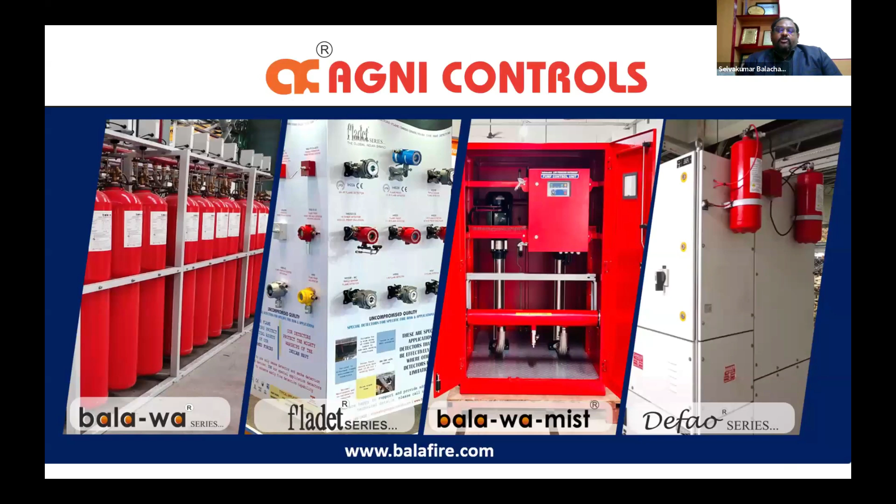We at Agni Controls offer products and systems in the following brands. Bala-wa series, which is gas-based fire suppression systems. Fladet series, for special application fire detectors such as heat, spark, ember, and high temperature probe type heat detectors. Bala-wa mist, water mist fire suppression systems, including low pressure and high pressure water mist systems.

And Defao series, which is tube based detect and extinguishing fire extinguishing systems. We have our presence in these following verticals: oil refineries, power generation, heavy engineering, automobiles, textile mills, and defense sectors. So without much details, I'm just showing our different customers, some important customers in all the segments.

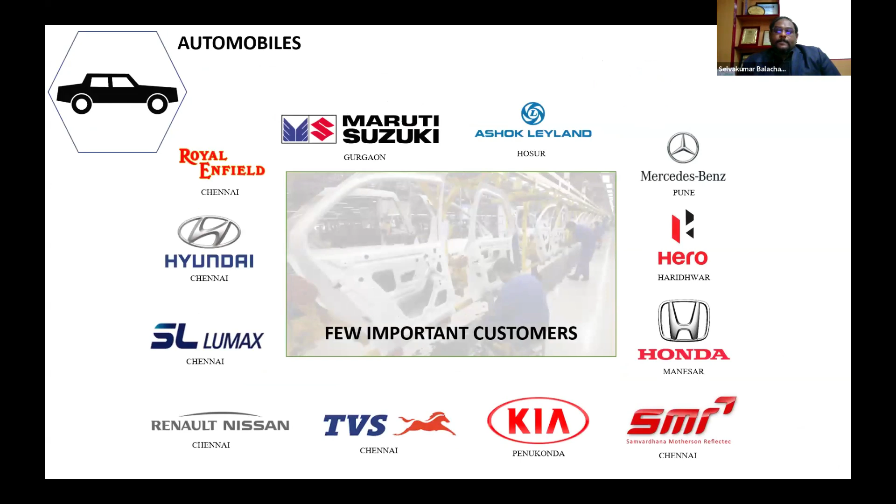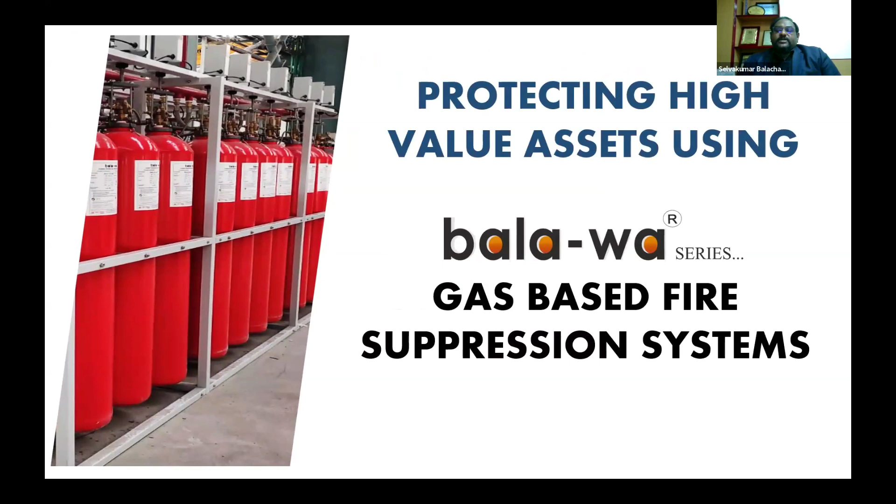So today, going to the topic, protecting high value assets using Bala-wa series gas-based fire suppression systems. So when you talk about gas-based fire suppression systems, we have carbon dioxide fire extinguishing systems, inert gas fire extinguishing systems, clean agent fire extinguishing systems. So inert gas is also a clean agent. As per NFPA 2001, inert and chemical-based extinguishing agents both are covered under NFPA 2001.

The reason why I put it separately is because inert is a naturally occurring gas, whereas the other chemical-based fire extinguishing agents are manufactured for the purpose of fire protection. So I want to clearly show a differentiation between the inert and a clean agent system.

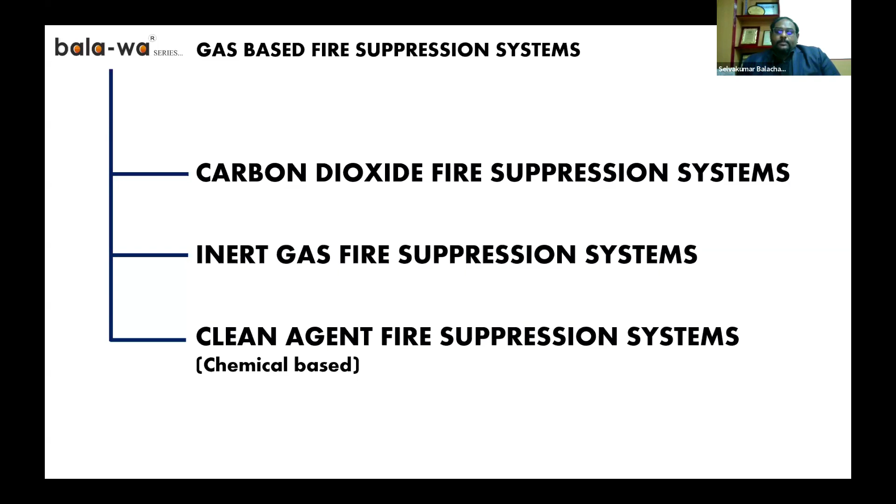So this particular topic, high value assets, is a very big topic, and I will not be doing justice if I squeeze in everything in this very small, brief time of 30 to 40 minutes. So I'm going to split this session into two sections or webinars. So today, predominantly, I will be talking more about the carbon dioxide fire extinguishing systems.

So when you're talking about high value assets, what are we talking about? Now with the modern technology, AI driven technology, data, everything, all the machineries which used to be conventional are now turning smart, and the cost of machineries is very, very high. And if your machine breaks down, of course, the entire production line or the process breaks. And the cost of a breakdown is unimaginable in many cases.

For example, a refinery. If a gas turbine is tripped, the power grid collapses. So you can imagine the magnitude of the assets. That is the reason why we are calling them high value assets. It's not just in terms of money, it is also in terms of their value. If your power grid collapses, it's going to be a widespread blackout, and restoring it is going to be a huge challenge.

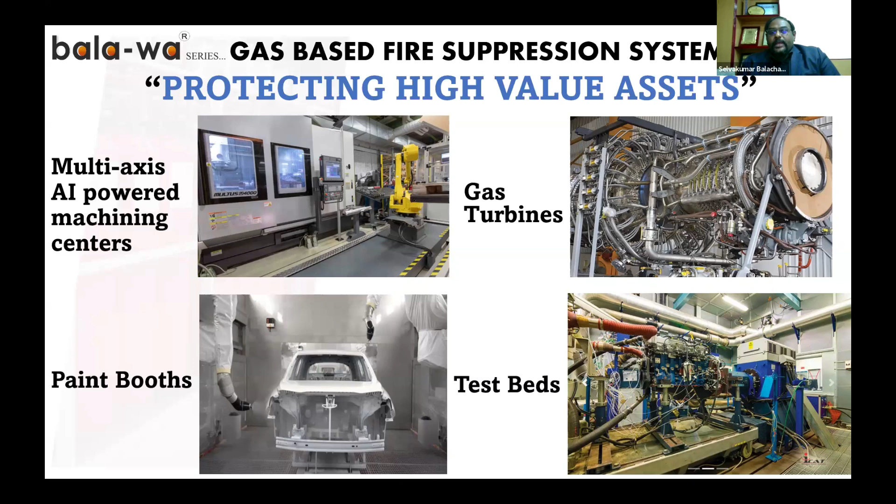So I've just shown some four images: multi-axis AI powered machining centers, gas turbines, paint booths, test cells or test beds. So why is it very, very important for us to protect the machineries? Well, this is a small machine, a CNC turning machine. And I will just show a small clip, a 3-4 second clip. So you can watch this clip. I'll play it.

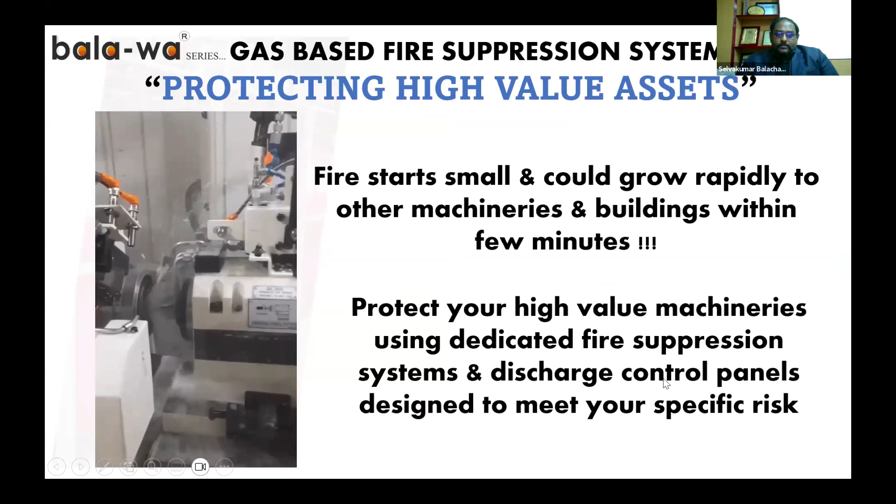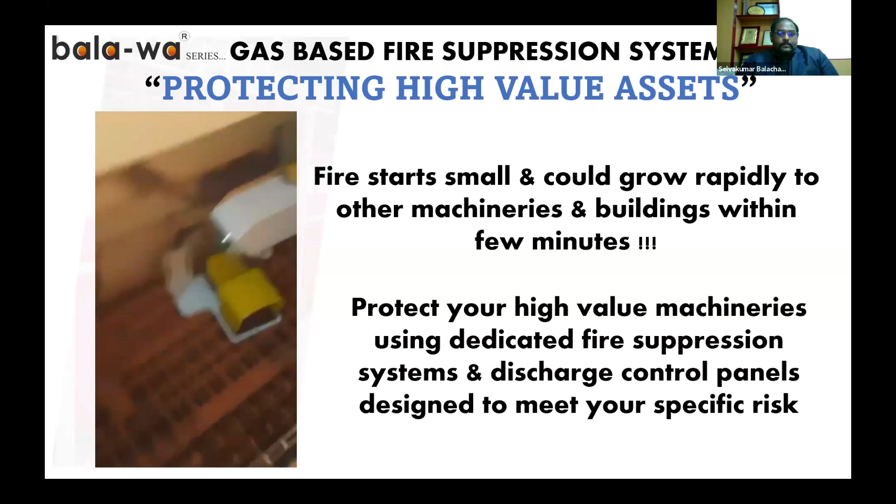So you could have seen that. In case any of you missed it, I would like to play that video once again. So this is actually a machining process. This is how fire starts in many of the applications. Fire starts very small, and if we are not equipped to extinguish the fire when it's small, it is going to grow rapidly to other machineries and throughout the entire building as well.

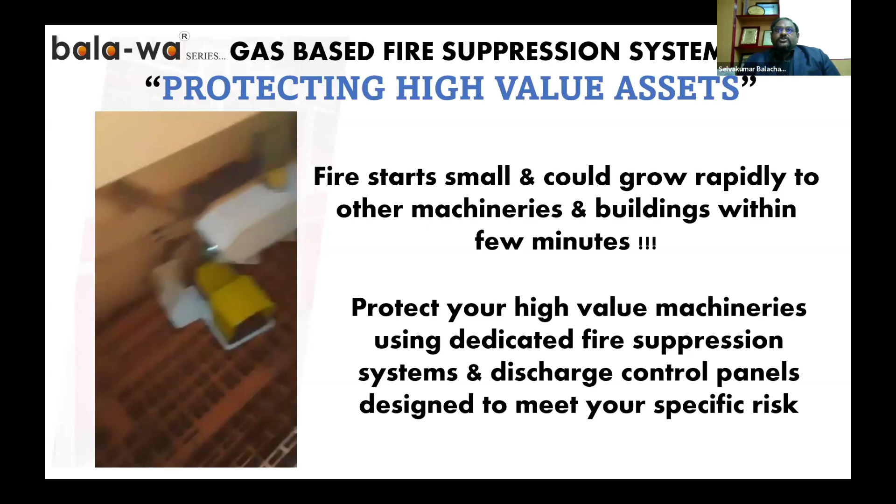Within a few minutes or even seconds, in some cases, if the calorific value of the fuel or the material burning is very high. So it is important for us to protect your high value machineries using dedicated fire suppression systems and dedicated discharge control panels designed to meet your specific machine risk. There is no one-stop solution; you cannot just buy a common panel which is available and use it for all the applications. It may work sometimes, but may not be suitable in many of these applications, which we will discuss in detail during the upcoming slides.

So what are we talking about in terms of protecting high value assets? Number one asset is always going to be human life. Life safety is going to be priority always. So personal protection. And the next big thing right now is the data. So data is the next big thing which needs protection. And without data, our entire infrastructure collapses.

Production machineries in many of the continuous process areas: without the machineries, the entire process stops. Of course, electrical infrastructure: without power, nothing runs. And storage areas, an area of concern where a lot of material with huge calorific values are stored. And these areas are often neglected. Test equipment and test facilities. In many of the cases, the testing equipment is much more expensive and critical than the actual production machines. So protecting all these different assets becomes our priority when we are talking about high value assets.

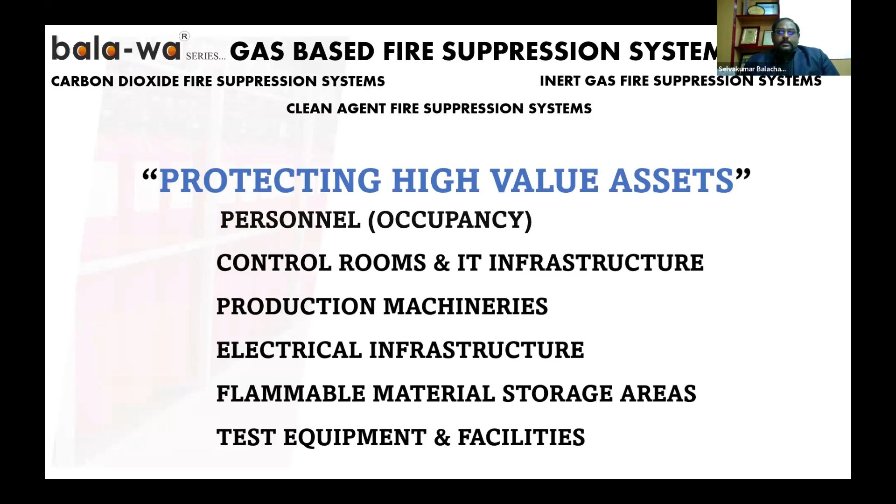So just for a small comparison, I have listed out what type of system can be used in protecting these various assets. So where personnel is present, CO2 cannot be used, which I will discuss in the upcoming slides. Control rooms, again, are normally occupied and it is not safe for human beings. Water will damage the equipment, so it is not used in many of these applications.

Production machines, electrical infrastructure, flammable storage areas, test equipment. So here you could see that in most of these applications, a gas-based fire suppression system, be it any extinguishing agent, is more suitable for protection of these kinds of equipment.

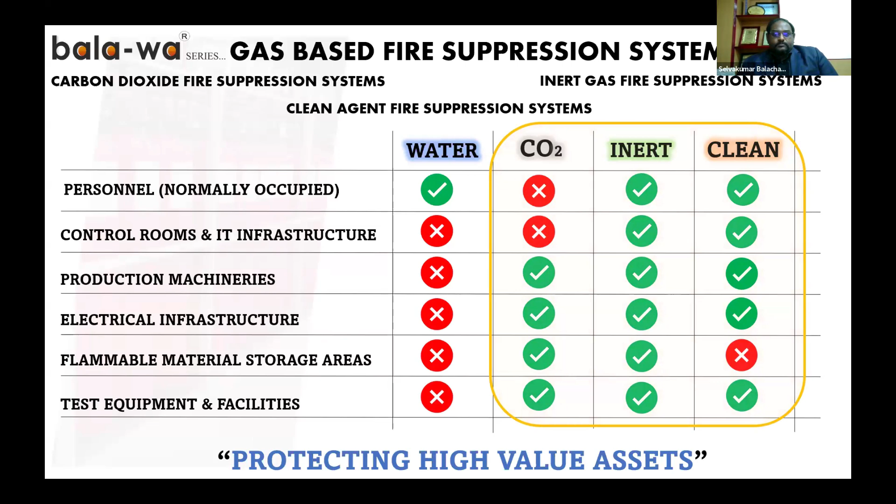So, as I told you, today we are going to discuss in detail carbon dioxide fire extinguishing systems and how they protect high value assets. These systems are designed as per the national and international standards IS 15528, NFPA 12, VDS 2093.

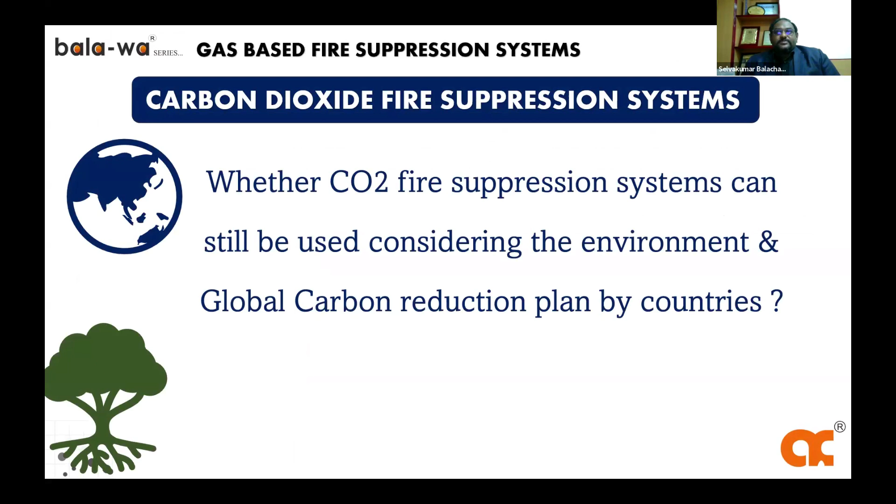Now the real question comes: CO2. When you talk about CO2, we often hear many people asking whether a CO2 system can be used considering the environment. While everyone is talking about green, clean energy, clean power, clean extinguishing systems, you're talking about a CO2 system. Well, today we will break the myth. And in the upcoming slides, I will show you why and how.

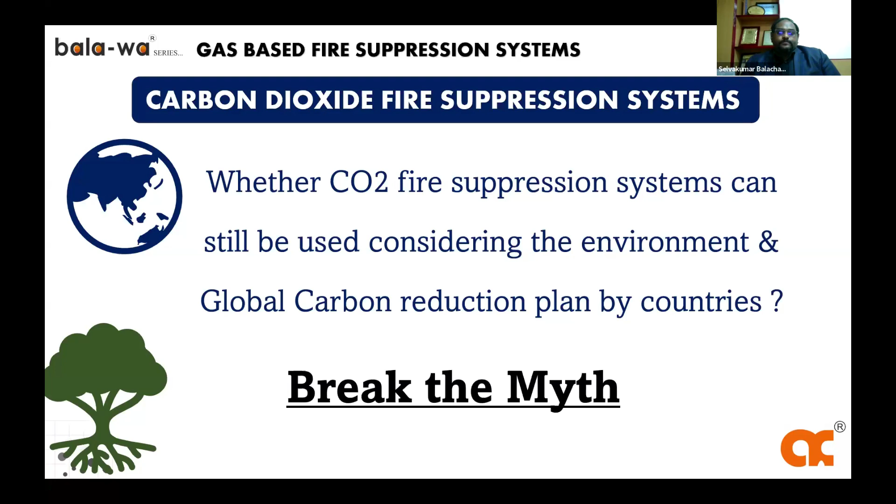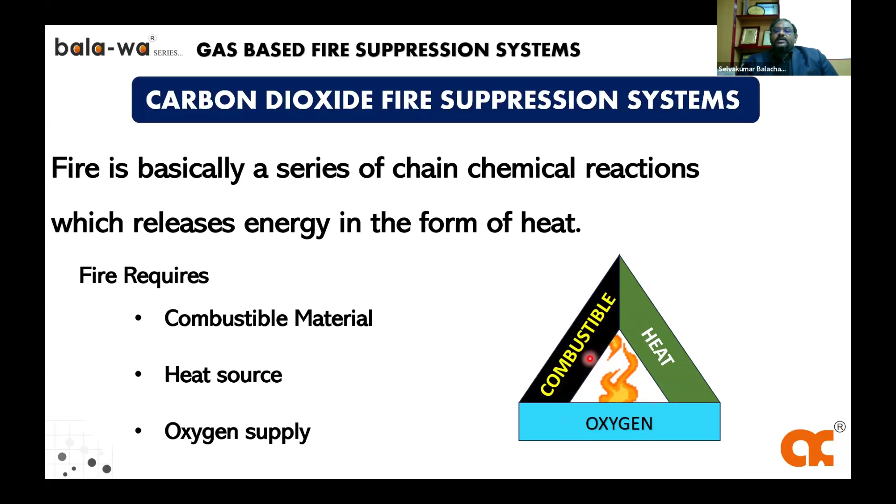So before going into the actual suppression system: fire is a chemical reaction, an exothermic reaction, meaning that heat is released as a result of the chemical reaction. This is what we call the basic fire triangle. Any fire to occur requires combustible material or fuel, which is always available in your risk area. Oxygen is always available in our atmosphere at 20.9%. And when sufficient heat occurs to ignite the combustible material, fire occurs.

So, how does CO2 extinguish the fire? Well, when you apply it, CO2 displaces the oxygen with carbon dioxide, and it also has a cooling effect. So CO2 breaks two of the three links in the fire triangle by reducing the heat, rather. It will not eliminate it, but definitely it will reduce the heat, and by displacing the oxygen content below 14% it ensures that fire is extinguished. And that is how carbon dioxide extinguishes the fire.

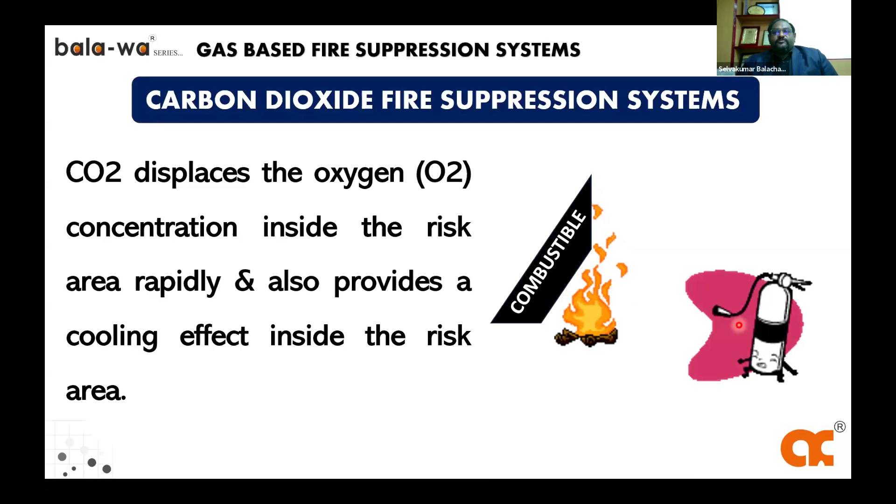So today, when we're talking about the CO2 system, we are going to see all these 6 points, which will give you a brief idea of what the gas suppression system is. For any system, we need to understand the physical properties. Carbon dioxide is a very unique gas where at the triple point it exists as solid, liquid, and gas. Depending on the temperature, carbon dioxide can either be liquid, vapor, or solid. At room temperature and pressure, CO2 is a gas. And when you fill it in high pressure cylinders, it is two-thirds liquid and one-third vapor.

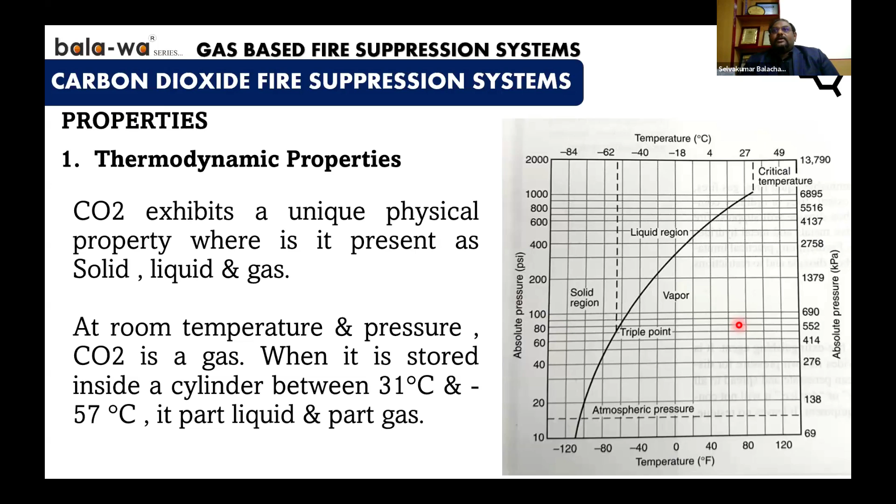Carbon dioxide has another unique property: the pressure of CO2 varies with temperature. It is directly proportional. So when temperature is low, the pressure inside the cylinder is low. When the temperature goes high, the pressure inside the cylinder goes high. An interesting fact is that 1 kg of CO2 will have the same pressure as 100 kg of CO2. And that is the reason why you cannot monitor the contents inside the cylinder using a pressure gauge.

With an extinguisher or a clean agent system or an inert system, you can measure using pressure gauges. Well, with CO2 they cannot be used because of these variations in pressure due to temperature fluctuations. That is the reason why CO2 cylinders are always kept in a hanging position using online monitors or weighing devices. Here you can see that all the cylinders are hanging through online monitors. So any loss of CO2 contents can be monitored through the weighing arrangement or the online monitors.

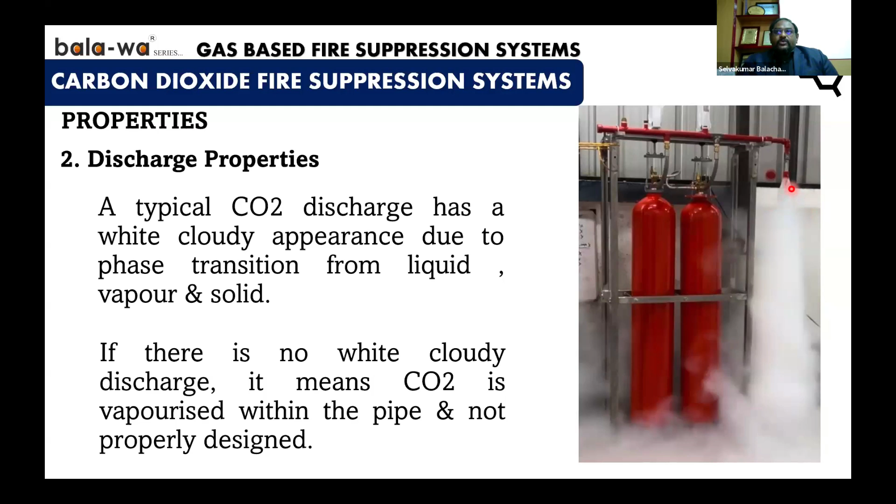So these are some other theoretical points, I'll go through quickly. CO2 discharges as a white cloudy vapor, this is where the transition happens from liquid to vapor. The nozzles and pipeline should be designed so that liquid converts into vapor at the nozzles only. This phase transition between liquid to vapor is what you see as a white cloudy fog. So if you discharge a system and see no white cloud, mist or fog, you know that your design or hydraulic system is not good.

When discharged, solid minute particles are released. It's important to earth the pipeline and the nozzles to ensure that static does not affect it, especially in explosion proof or flame proof atmospheres.

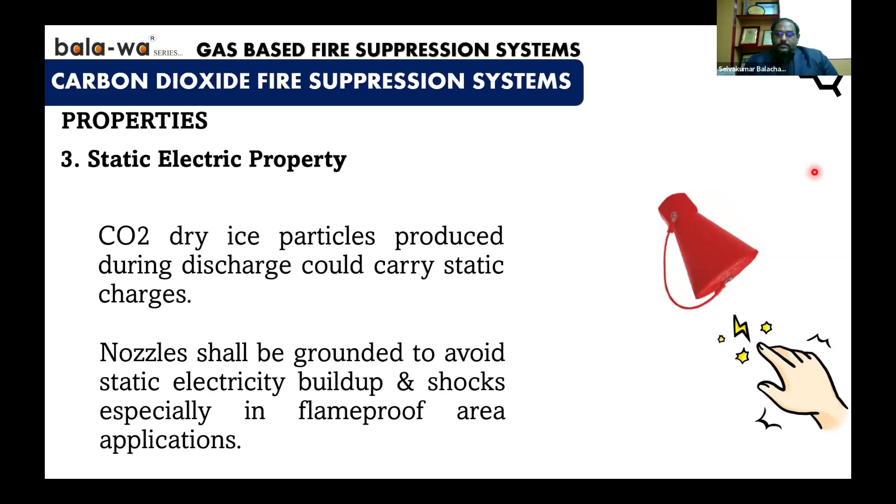Now we're going to talk about the environment. As I told you, we're going to break the myth about the impact of CO2 systems on climate and environment.

This is a UN Environment Programme document, a report from the Halon Technical Options Committee, published in December 2018. The report says that carbon dioxide used in fire protection applications is not produced for this use. Instead, it is captured from an otherwise emissive use, temporarily sequestering it until it is released.

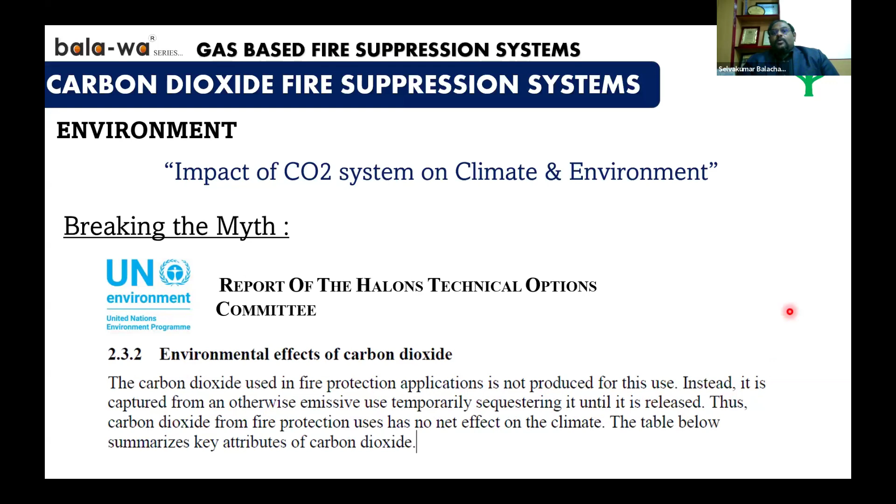So what it says is, number one, CO2 is not produced for the purpose of firefighting. CO2 is not manufactured just for fire protection; it's a byproduct of many other chemical processes like petrochemical refining, sugarcane, and alcohol production. So irrespective of whether you use a CO2 system or not, this CO2 is going to be released into the atmosphere unless the entire refining process, sugarcane, alcohol and other processes stop using it. We are not going to stop having CO2. So that's number one.

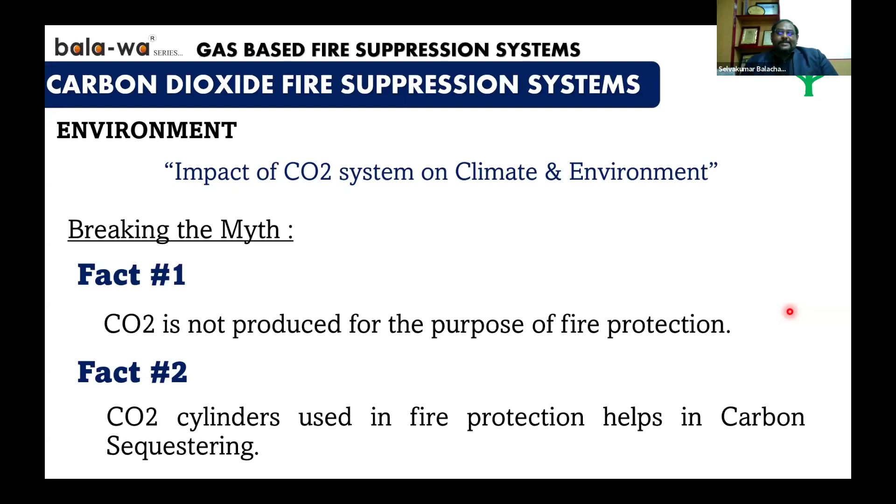So what we are doing instead of letting it go into the atmosphere is that this carbon is sequestered. What do you mean by sequestering? Instead of letting it go directly into the atmosphere, we are catching, securing, and storing it inside cylinders rather than directly exposing it to the atmosphere. So what we are doing is rather delaying the inevitable. That's what is happening.

And the conclusion of that UN climate committee was that CO2 systems have no net effect on climate. Which means whether you use a CO2 system or not, it is still not going to have any effect on the environment. It is going to be the same.

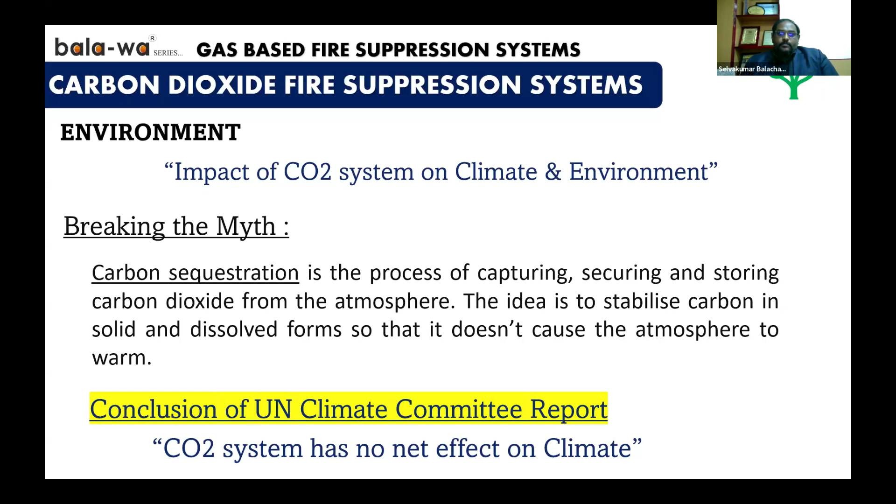That is the reason why carbon dioxide systems still have standards, not only here in India but throughout the world, even in the European Union where they talk about climate change. It is not banned because they cannot directly write off carbon dioxide, as it is still considered one of the best extinguishing agents for machinery applications and normally unoccupied or non-occupied areas.

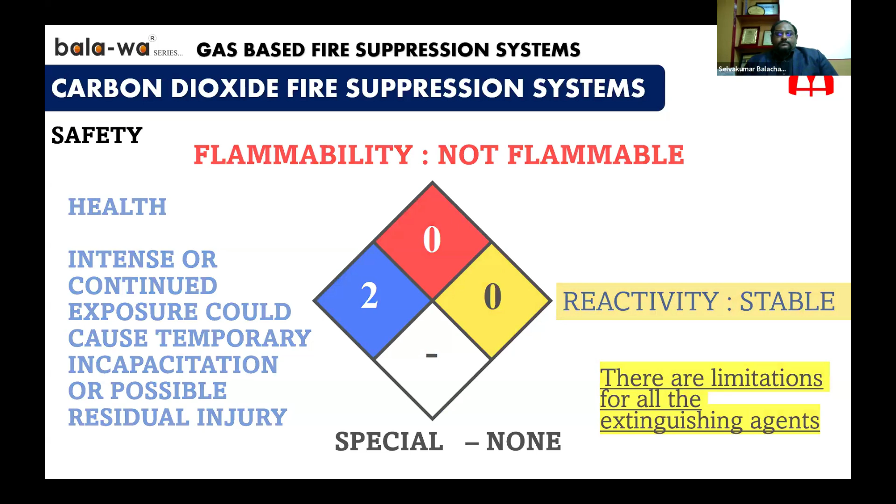So what happens inside the human body once you inhale or ingest? We all know that oxygen is carried in the blood cells to our brain and other parts of the body, all the cells. As I told you in the fire triangle slide, oxygen is displaced with carbon dioxide. The same happens in our bloodstream. The oxygen content inside our bloodstream is replaced with carbon dioxide, and the hemoglobin turns to carboxyhemoglobin.

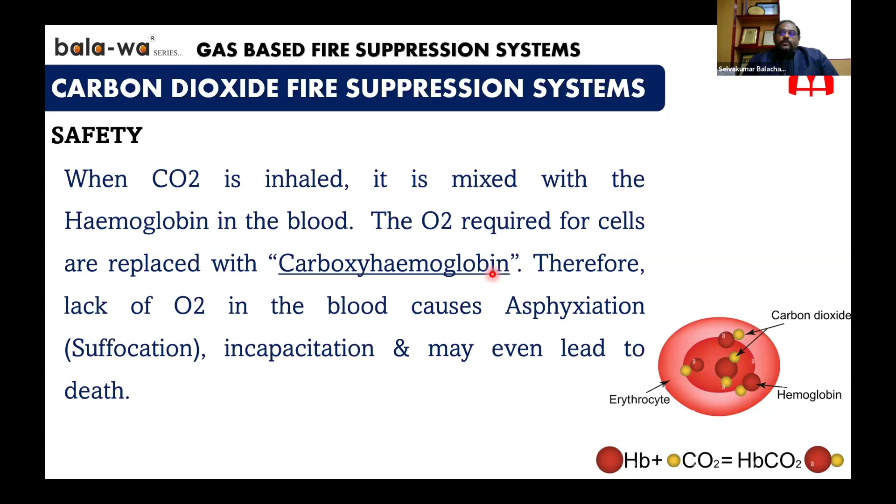There is a starvation of oxygen through all the cells, including the brain. That is why we have suffocation, asphyxiation, which causes you to fall unconscious, and ultimately it may even lead to death. That is the reason why carbon dioxide systems are normally not used in areas where human occupancy is always present.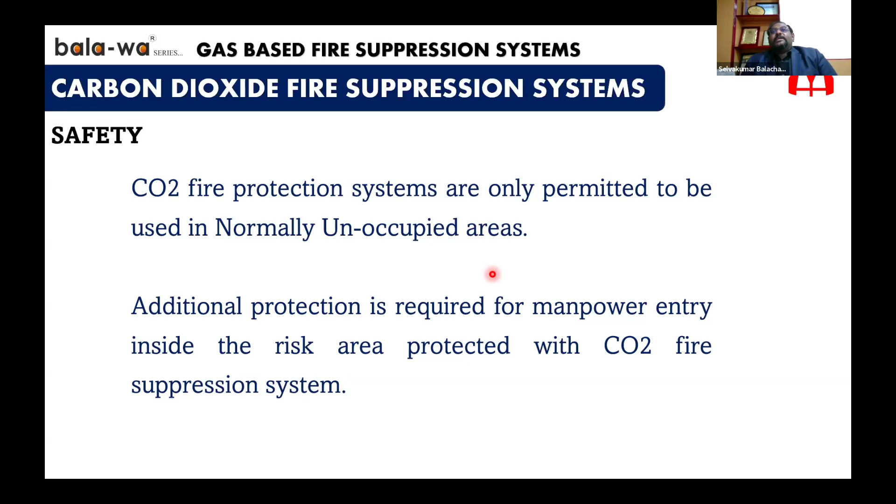However, additional protection is also required. You cannot simply say I have a machine and no one will enter. Someone has to go inside the machinery to service it, operate it, or in case of overhauling. We cannot completely avoid entry. So for that, other safety components need to be integrated with the system.

For example, we have the wintergreen odorizer. The wintergreen odorizer contains wintergreen oil, similar to axe oil or eucalyptus oil, with a very strong, pungent smell. So if you are not able to hear the alarms, or if the electrical system fails and you can't hear the flasher, hooters, or strobe horns, anything won't work. But if gas is discharged for some reason, you can get that strong smell even in the adjacent room.

If CO2 is leaking somewhere, you know that gas has leaked and you can evacuate the area. This is used in machinery to notify people that carbon dioxide gas has been released. The manual lockout valve, as I said, before entering the machines, the pipeline has to be completely isolated to prevent human discharge when a human is inside the machinery. And CO2 evacuation units are used to extract the CO2.

CO2 is a very dense agent, meaning once discharged, the gas settles at the bottom. So when discharging CO2 in an underground cellar or an oil pit or somewhere underground, the CO2 will be present at the lower level. You want to extract the CO2 into the atmosphere so that it is safer for human entry.

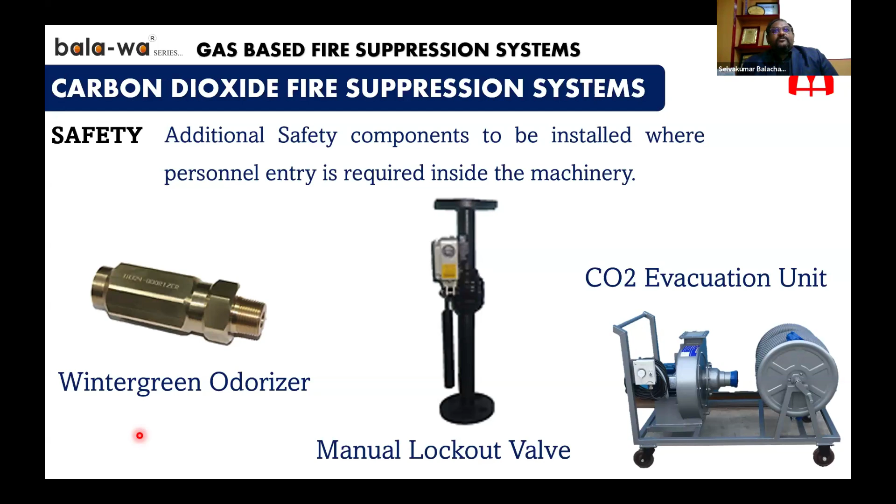Coming to the design basis, CO2 systems are available as high pressure systems and low pressure systems, depending on the storage temperature. As I told you, high pressure cylinders mean ambient temperature, not exceeding 49 degrees Celsius. It is stored in cylinders, which we normally use here in India.

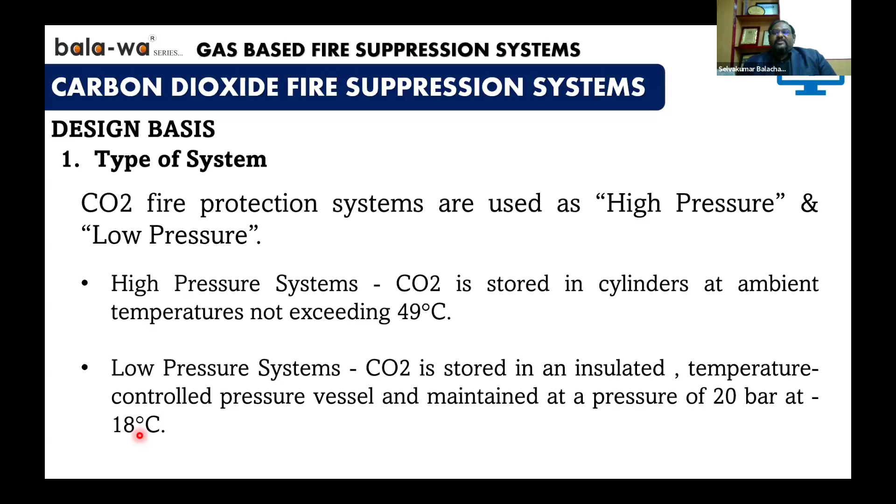Low pressure systems are used for bigger areas where a refrigeration unit, a big bulk container, is required. Refrigeration units are constantly required to maintain the CO2, the entire tank, at minus 18 degrees Celsius, so that the CO2 is maintained at 20 bar pressure. The running cost of low pressure systems is very, very high, and that is the reason why we don't use low pressure CO2 systems.

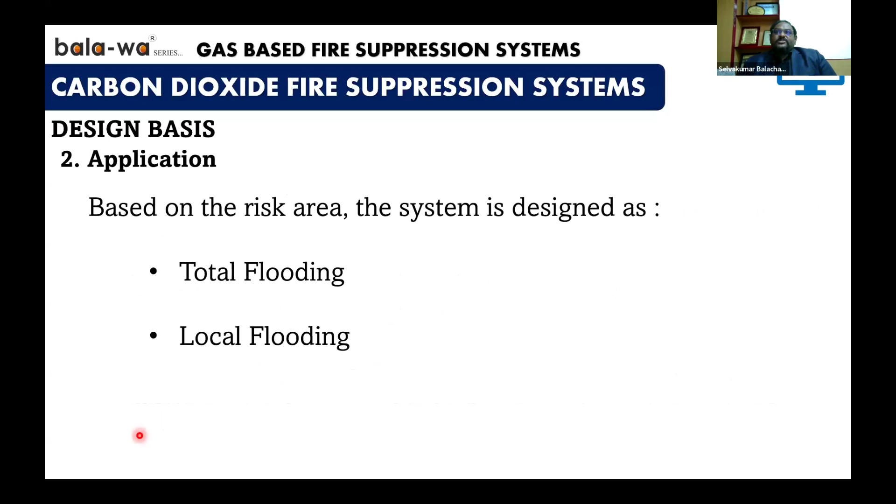Depending on the risk area, the system is also designed as a total flooding system or a local flooding system. What is a total flooding system? As the name suggests, the entire risk area, room, or machinery void is completely flooded with CO2, and the overall oxygen percentage inside the room is brought down from 20.9% to below 14%, thereby extinguishing the fire.

So wherever your nozzles are, wherever your equipment is, the total area, the entire volume is considered, and the overall volume is brought down below 14%. That is, I'm talking about the oxygen content.

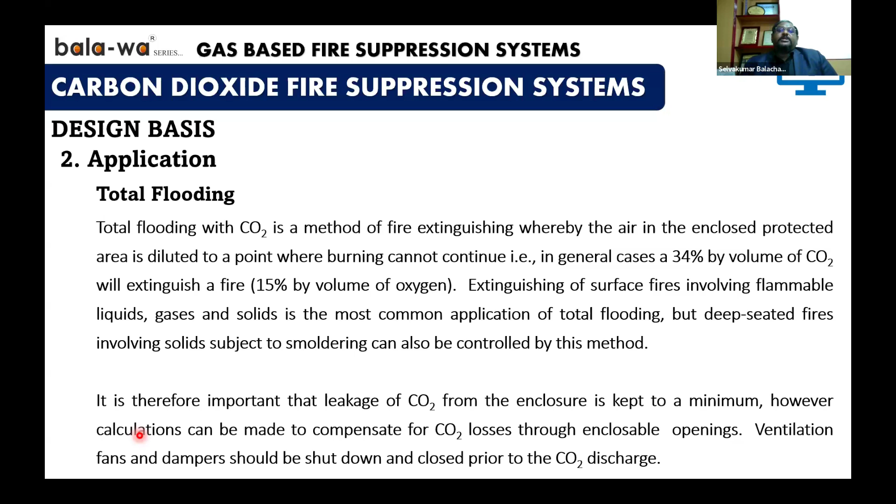So we are talking about the overall volume. We have to consider the openings. If there are any closable openings or ventilation ducts, all those things need to be considered. Even if interconnected, if you have a room next door connected through a small door, it is also recommended to consider it as an interconnected volume, and the volume of the total area needs to be protected.

And local flooding is for areas where it is not entirely covered. Consider a room, two or three sides are closed and one side is completely open, opening into a very large warehouse or factory building. You cannot provide total flooding for the entire warehouse of thousands of square feet or meter cube in volume.

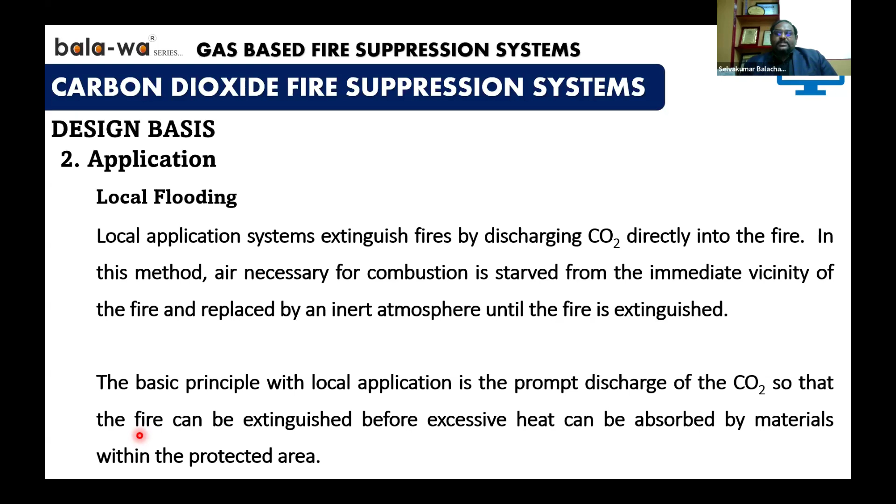Here the nozzles are provided in such a way that they target directly the risk application. For example, you are protecting a rolling aluminum mill. The nozzles are positioned so that the liquid part of CO2 is directly discharged onto the actual fire risk areas like rollers, drums, or wherever fuel lines are going. So here we will have a number of cylinders, or more quantity of cylinders, rather than a total flooding system.

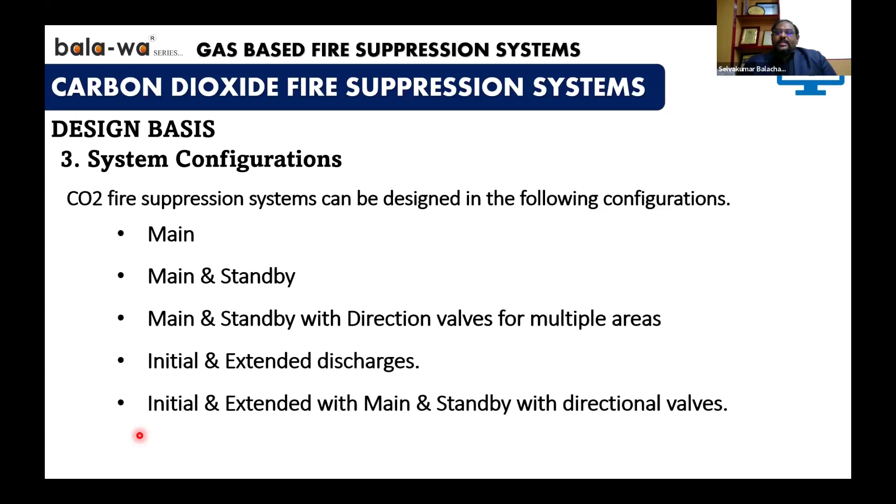Depending on the risk area, cylinder systems are available in various configurations: main; main and standby with directional valves for multiple area protection; and initial and extended discharges, initial and extended with main and standby with directional valves. So these are the different types of configurations.

Main is used for primary protection of the risk area. Main and standby provides primary protection with 100% online redundancy. Main and standby with directional valves is for multiple area protection using a common cylinder bank.

Initial and extend, as per the standard recommendation, is used to extinguish fire in rotary energized electrical equipment. You need to give an initial discharge which will quickly extinguish the fire within 60 seconds, and then an extended discharge varying from 5 minutes to 40 minutes, or even up to 1 hour, depending on the machine being protected. The purpose of the extended discharge is to keep the oxygen level in the volume below 16% for as long as possible.

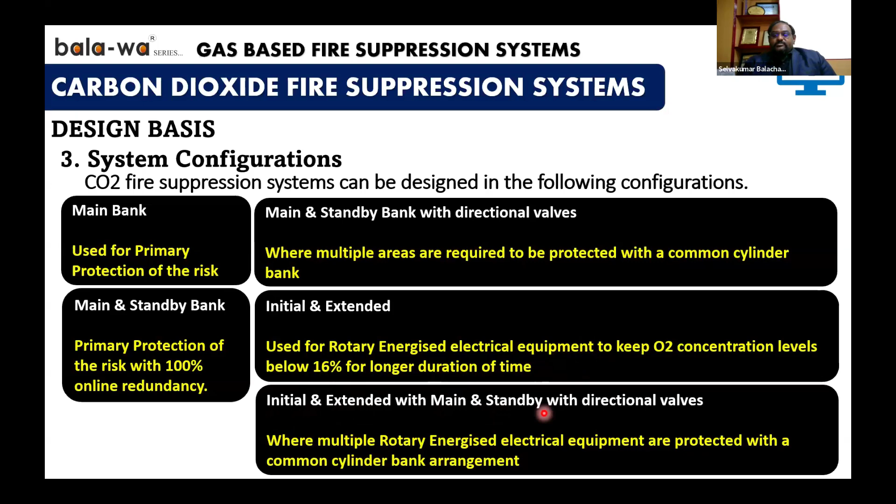And the final one is initial and extended with main and standby with directional valves. For our understanding, here is a small schematic configuration of the main bank. This is a compact CNC machinery where we have two nozzles and a single cylinder protecting this machine.

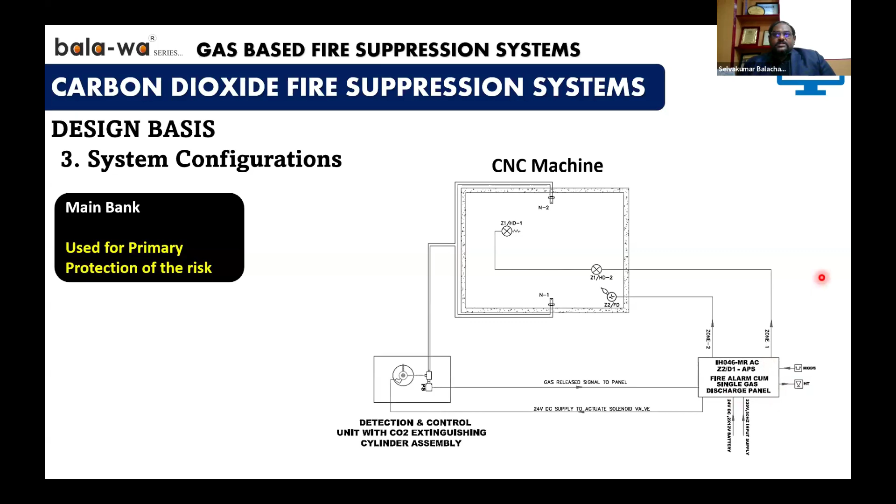Here you can see that when we talk about fire extinguishing systems, we are not just talking about cylinder, pipe, and nozzle. This is a system, and it requires early fire detection, a discharge control panel, and evacuation units. The tripping, everything has to work in tandem to successfully extinguish the fire. It is not only the cylinder or the pipeline or the nozzles, it is the entire system which has to be perfectly designed.

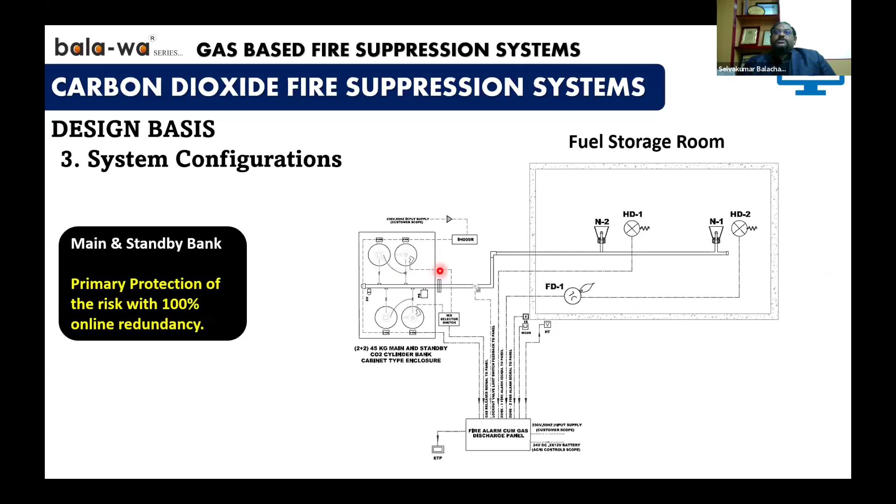So here, this is a main and standby configuration. We have two cylinders as main and two cylinders as standby. For some critical areas, customers or applications feel they don't want to take a risk, so if the main cylinders are discharged, they have to go out for refilling and come back. During that time, the standby cylinder is kept in online mode so there is no downtime for the extinguishing system. This is a main and standby cylinder bank.

This configuration protects various risk areas using a common cylinder bank. Here we have designed a 5-cylinder main bank and 5-cylinder standby bank, protecting 5 different risk areas. All of these pipelines are connected to directional valves through various pipelines and nozzle arrangements. Wherever there is fire, that particular area alone opens and gas is distributed only to that network. Subsequently, if another area also requires it, the other bank will also operate.

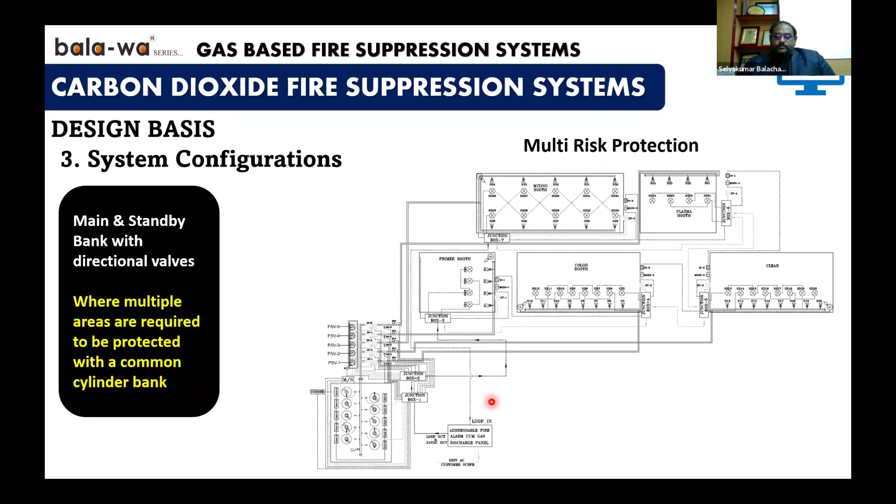This was the initial and extended discharge I was explaining previously, shown here for turbine protection. Turbines are rotary energized electrical equipment running at several thousand RPM. Once you trip it in case of fire, it is not going to suddenly stop like switching off a light. For example, your fan, when you switch it off, is not going to come to zero instantaneously like a light.

It's going to come down slowly to a zero position. Imagine a gas turbine running at maybe 5,000 or 6,000 RPM coming to zero - it is going to take somewhere between 20 minutes to 30 minutes.

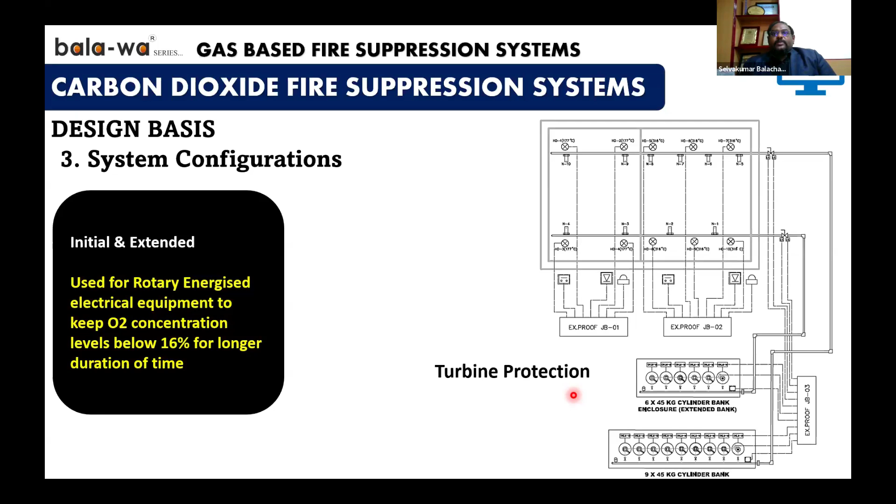So this is also a similar application, rotary electrical equipment, main and standby, using directional valves to protect multiple risk areas using a common cylinder bank. We have a main bank of 4 cylinders and a standby bank of 4 cylinders. This is acting as the initial discharge, whereas extended discharge is also available.

Here, the extended cylinder quantity, you need to know that it is not always the same. Extended cylinder quantity is actually designed, as I told you, based on the duration of discharge required and the volume we are trying to protect.

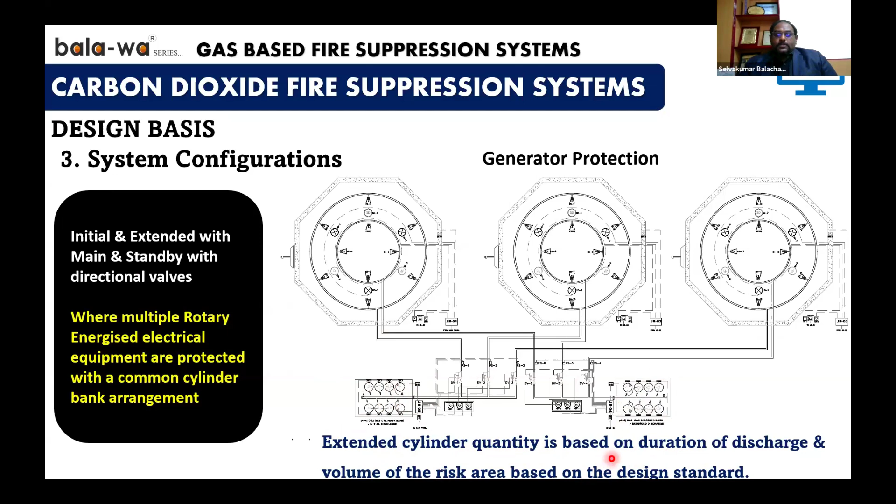So, what are the factors that we need to consider while calculating the quantity of CO2 that is required? Number one, the volume you are going to try to protect. What material or fuel is available inside that risk area? Any area-specific risks like any explosion-proof atmosphere, or any openings or any fuel lines that need to be tripped, openings that cannot be closed, ventilation systems which cannot be shut down, temperature of the protected areas, all those things shall be considered.

So here, for unclosable openings, if the anticipated loss of agent is more than 40% of the risk volume, the system shall be designed as a local flooding system as per the NFPA. And as per VDS, it is just 2%. So if your unclosable opening is more than 2%, you need to design the system as per local flooding as per VDS 2093.

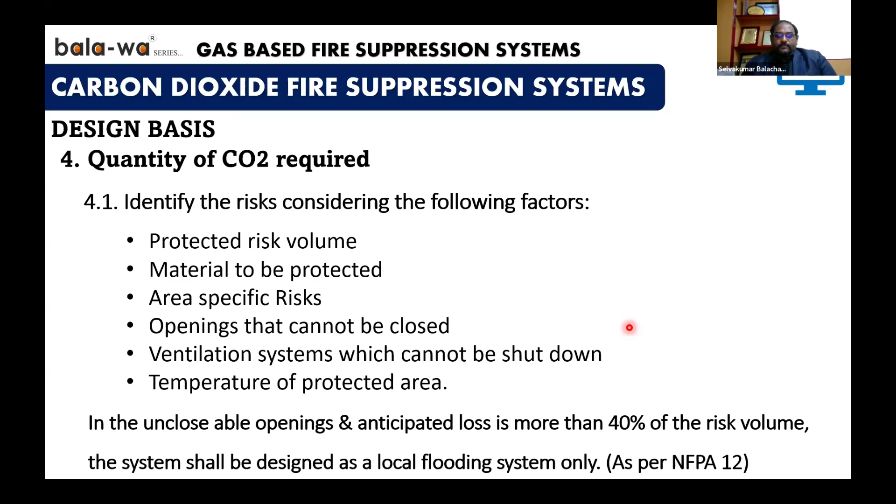So we're talking about flooding factors. What is a flooding factor? Flooding factor is nothing but the quantity of CO2 required per meter cube of the volume. All these details are clearly given based on the test results in IS 15528 table 3 and NFPA 5.3.2.2. So, what are the other factors that we need to consider? Volume, temperature, loss, material conversion, and deep seated fire.

There are two types of fires: surface fire and deep seated fire. Deep seated fire means on the surface it may seem that extinguishing has happened and it has completely extinguished, whereas underneath the surface the fire will still be present. And once sufficient heat has come up, it is going to come into fire again. So, deep seated fire requires additional concentration as per the standards also.

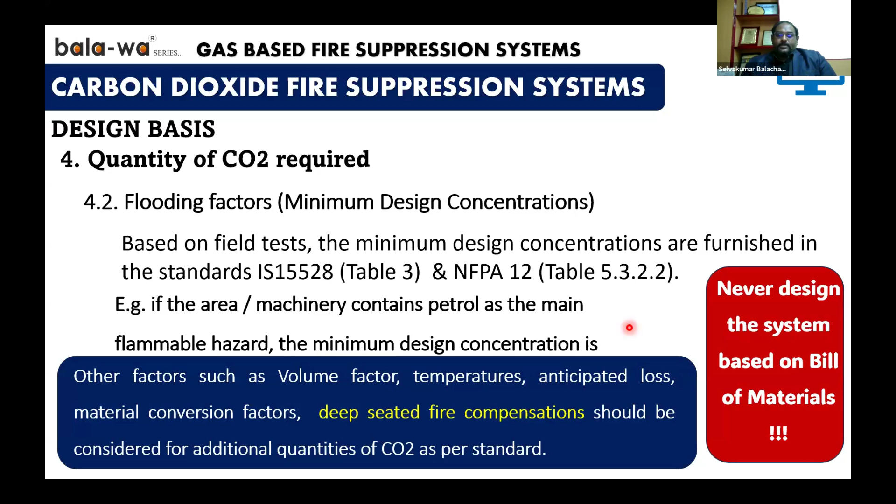And what I would like to insist is never ever design your system based on a bill of quantity. How many times have we experienced, as fire protection specialists, that your BOQ comes and you are asked to quote as per BOQ? I would suggest to the experts and the people who have participated in these events, if you get a BOQ and you have been asked to quote, please ask them to send the design data, design the system as per the requirement, and then only quote. This is my humble request.

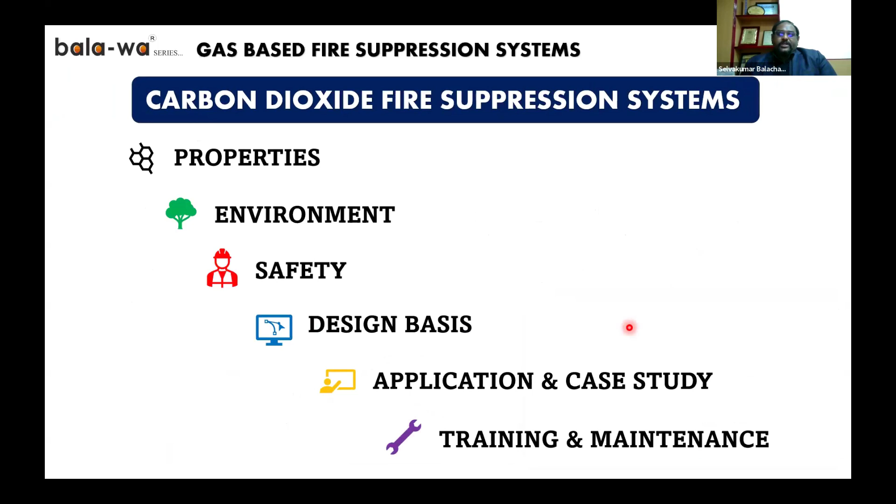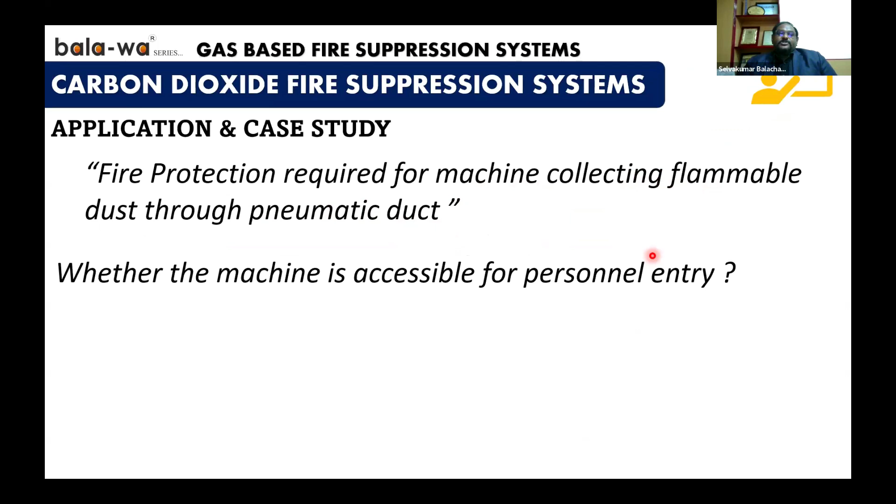And the hydraulic calculations, just to validate whether your CO2 system is designed properly, using licensed and validated VDS software. So we are just going to take a small case study. This case study is fire protection required for a machine which is collecting flammable dust through a pneumatic duct arrangement. The first question is whether this machine is accessible for personnel entry. These are dust collector machines and manual entry is not possible. So it is a no.

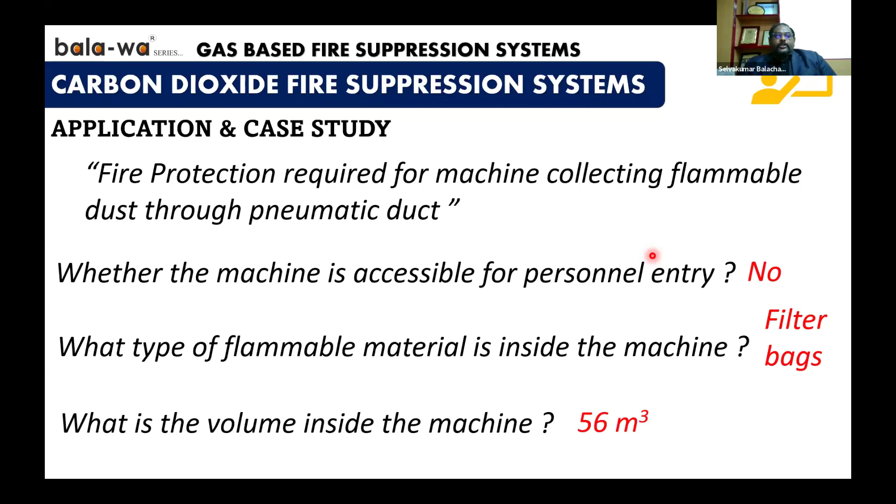The next primary question would be, what type of flammable material is available inside the machines? These dust collectors will have filter bags inside them, often made of cotton or another synthetic material, to filter the dust. And what is the volume inside the machine? That is the risk area we are going to protect. Let us say, for example, the volume of the risk is 56 meter cube.

Let us consider the design temperature as ambient 30 degrees Celsius. The minimum design concentration or flooding factor required is 2.66 kg per meter cube, as per the standard table which I have given here. For specific hazards, it is already listed there. So what is the quantity of CO2 required? It is 56 into 2.66, which comes to around 149 kg of CO2.

It is always safe to consider a 10% leakage factor through hoses or any nipples that you have not properly tightened during installation, or any other reasons. Always consider a 10% leakage factor. So multiply that by 1.1, and you get 163.9 kg. Here we generally use 45 kg CO2 cylinders, that is 68-liter water capacity.

So what I've done is I've divided by 45 and I got 3.6 cylinders, which is approximately around four numbers of 45 kg CO2 cylinders. So you might consider, okay, I can use maybe three numbers of 45 kg and one number of 34 kg, just to meet the direct requirement.

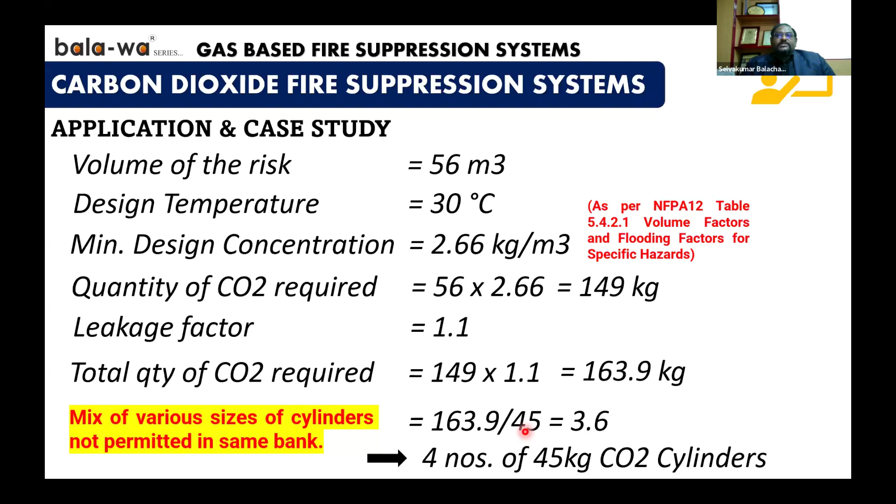Well, the standard does not permit that. Mix of various sizes of cylinders is not permitted in the same bank. The standard clearly does not permit us to use various water capacity sizes inside the same cylinder banks. So that should not be done.

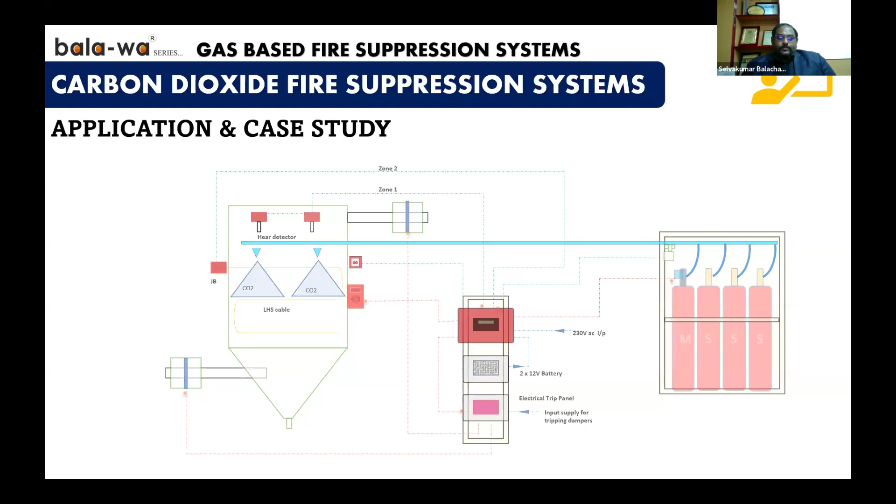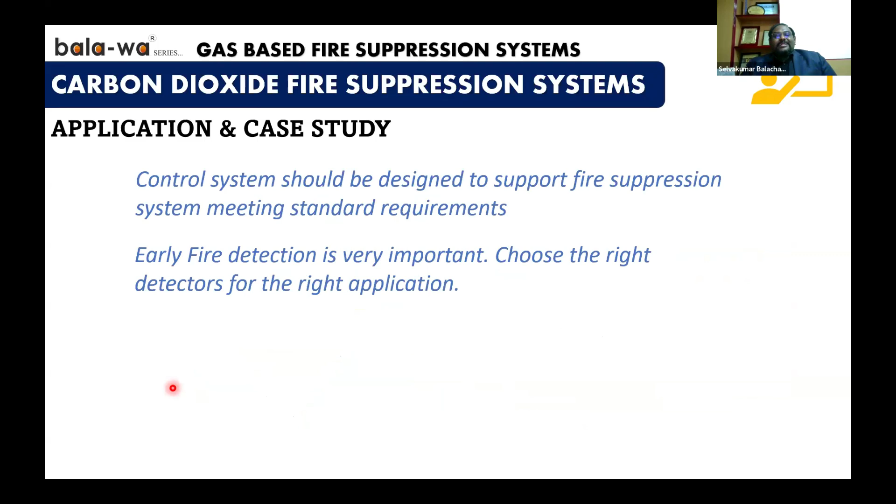So this is the typical application we have seen today. The control system should be designed to support the fire suppression system, meeting the requirements. As I explained many times, it's not just the cylinders, it is also the entire control system. Early fire detection is very important. Choose the right detectors for the right application, which we have seen in the previous webinar, and we will also cover later on.

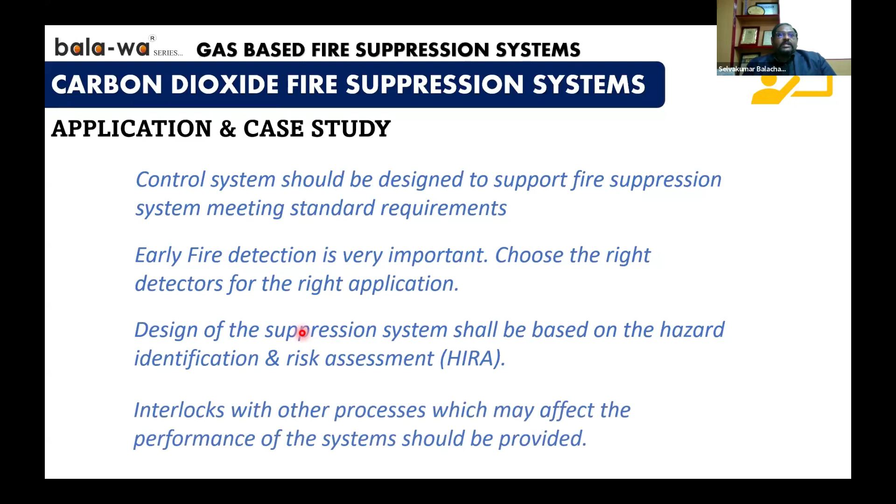The design of the fire suppression system shall be based on the hazard identification and the risk assessment. As I explained before, there is no one-stop solution for everything. Each risk has to be assessed separately. Interlocks with the other processes which may affect the performance of the system should also be provided. For example, if the door is opened, the CO2 system should not be discharged. Or if the CO2 is discharged, the incoming fuel lines or the HVACs, everything should be tripped.

And once you have designed all these things, how to validate, how to know whether what you have given is actually working in the field? You can validate using the concentration measurement method. Post discharge, you can measure the residual oxygen level inside the risk area to know that your oxygen percentage is below 14% after discharge. If it is below 14% after discharge, you know that your system is perfect and it is going to extinguish the fire at any cost.

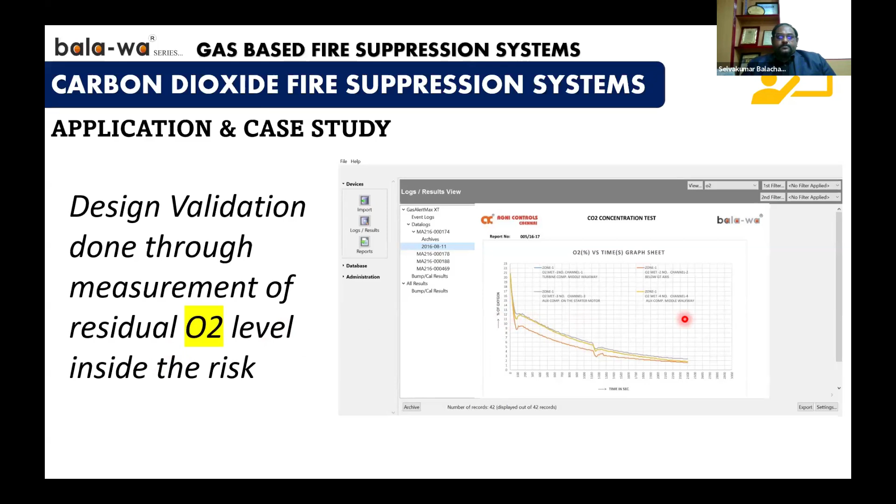And coming to the final part, which is the most important part in my view. In many cases, the systems are designed perfectly, installed, commissioned, and handed over to the customers. So, what happens post handover? We need to educate the users to let them know what they need to check for. Whether the cylinders have a valid PESO certificate; it is a mandatory requirement as per the Indian Gas Rules Act.

Valid means it's like 5 years. Every cylinder has to be hydro tested once every 5 years. So if there is a need to be hydro tested, it has to be sent for refilling, discharged, refilled, hydro tested, sent back and recommissioned. It is a mandatory requirement as per the gas cylinder rules of India. Visually inspect all the components and check if the components are fitted.

In many cases, I have personally seen they would have tested or discharged the system. In case fire happened, the cylinders would have been discharged. They would remove the cylinders, send them for refilling, bring them back and reconnect. In many cases, we have seen that the cylinders are not properly connected. There are several valves which have a separate filling port and a separate discharge port. The hoses are wrongly connected to the filling port rather than the discharge port. In many cases, the customer is not aware of what to do, and ultimately when fire happens, it's not going to put off the fire.

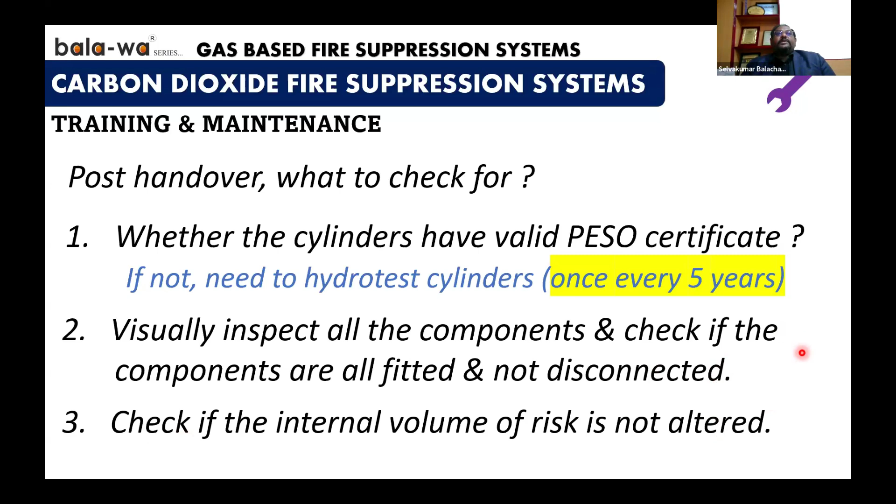And also the customer changing the internal volume of the risk area. There would be a sudden expansion plan, so they would have increased the volume, maybe instead of 56 meter cube they would have gone to 66 meter cube. For them it would be just 10 meter cube of volume. For the fire suppression system it may not be efficient. So that is also something we need to consider post handover.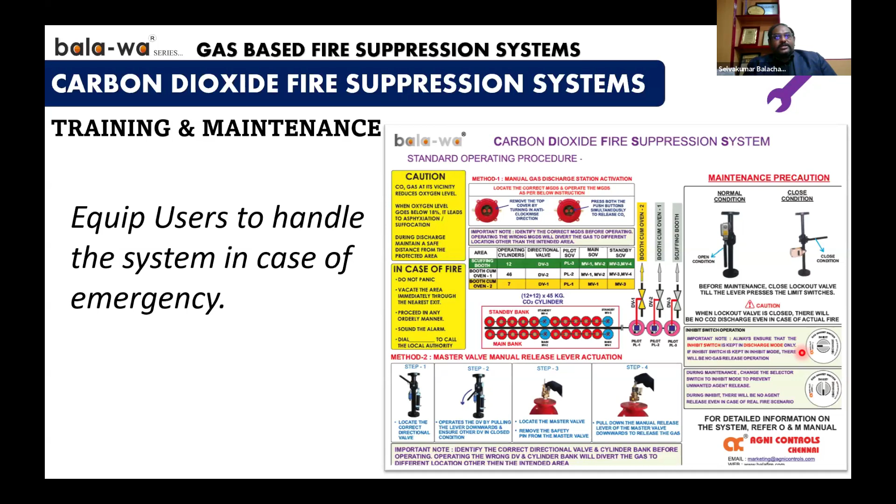And also, as I explained, we need to equip the customer to handle the system. This is a high pressure system. To handle, operate, and maintain the system in case of emergencies, a brief SOP, standard operating procedure, has to be provided near every risk area or cylinder bank, detailing almost everything possible to help them do maintenance, what they should do in case of emergency, how to operate, and in case the panel is dead, how the cylinder can be manually triggered. All these details have to be provided to the customer.

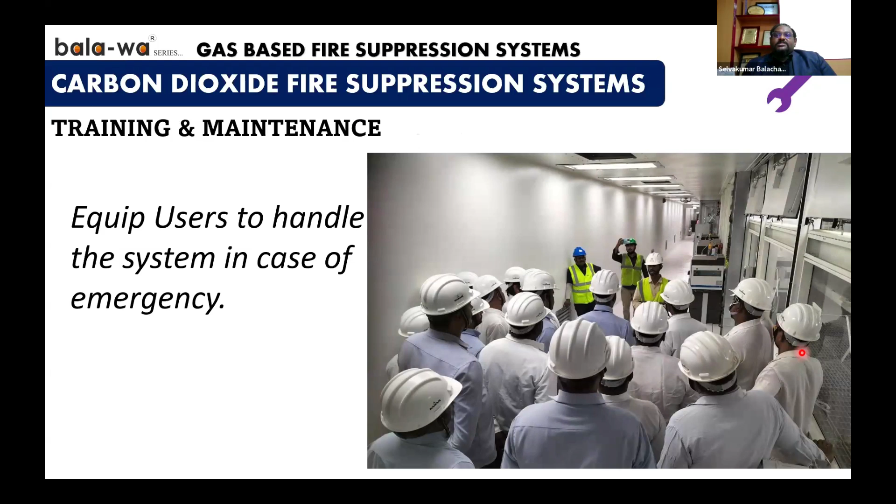And of course, training, which is very, very important. Not only train the heads, we have to train the people who are at the lower level. Even if they work in three shifts, all three shifts have to be trained properly on handling and how to operate in case of emergencies. So it becomes very important for us to equip the customer to handle the system, because ultimately they are the users.

Okay, so with that, I have come to the conclusion of the webinar on protecting high value assets using carbon dioxide. Four days back, on the 15th of January, our Honorable Prime Minister Sri Narendra Modi commissioned three naval vessels, INS Surat, Nilgiri, and Vaghsheer. We are proud to say that our extinguishing systems protect the engines of the mighty P-17 Alpha stealth frigate, INS Nilgiri. Agni Controls is proud to be part of this prestigious defense project. Our equipment is mil graded and JSS 55555 approved. With that, we have become the first Indian company to successfully indigenize the fire protection system for navy warships. Previously, it was from the Russians.

Can you get the reading of individual cylinders? See, you can take a reading, but when you show a digital display of the weight of each cylinder, it falls under the metrology department of India, and you have to calibrate each and every instrument showing the display once every 6 months. So it is as good as removing the cylinder, putting it on a weighing scale, recording, and putting it back in the hanging position. That is not going to solve the problem, which is why we've not gone ahead with displays. This weighing unit has a calibrated spring action arrangement inside, designed for 10%.

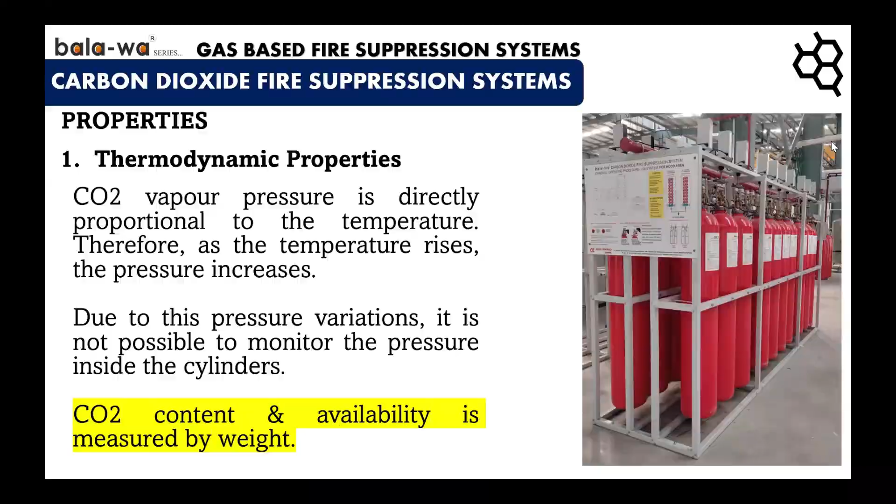My doubt is you are giving the total of the installation system. I want to know about individual cylinders, without disturbing or taking them out. So this unit is for each individual cylinder. Any individual cylinder with more than 10% weight loss will be indicated. We have two models. One model has an individual LED display with two LEDs, green for normal and orange for check for refill. So if there is a 10% loss in, let's say, cylinder number 3, only that unit will show orange.

We understand by pressure gauge only, am I correct? Not pressure gauge. This is a weight monitor. Will we get the weight also? Not the weight. Since the standard says 10%, let's say we are using a 68-liter water capacity cylinder, the maximum filling is 45.4 kg, which means if there is a 4.5 kg loss, I need to show a low weight indication. So all our units are calibrated to give an output at 4.5 kg loss. I agree, sir. My point is...

Any individual weight that needs to be given - so as Selva said, it comes under the Weight and Measurements Act. That's a different statutory matter. My point is, can it give the correct loss of an individual cylinder? How much CO2 is lost? That is not given - the required loss when it goes beyond 10%.